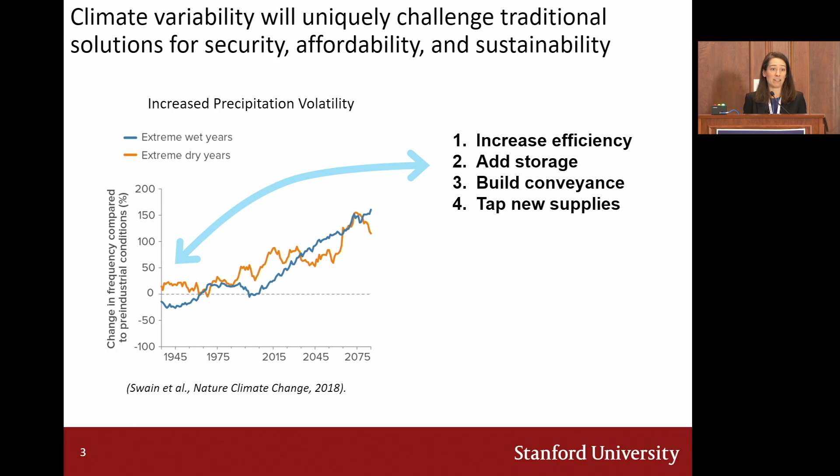In an era of higher volatility, that infrastructure suddenly has to address a 90% supply deficit in one year and turn around and manage massive flooding in the next. And that's much, much more challenging to design for. It's also much more costly to design for.

And so this, I think, sets us up in a little bit of a conundrum. We can either build a lot more of the same infrastructure, or we can build a very different type of infrastructure system or network to natively adapt to that volatility. That's the challenge, first and foremost, for securing water systems in an affordable and sustainable way under new climate regimes.

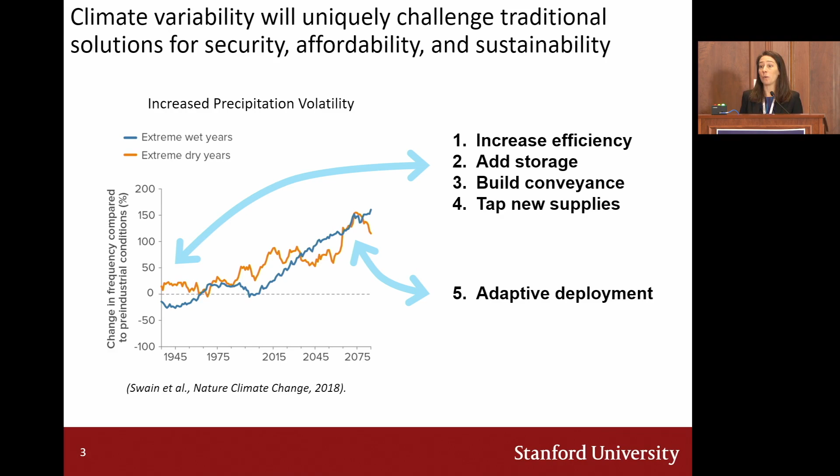And I want to talk in this presentation a little bit more about how I think we can help get us there. So how do we maximize the financial value of investments and their adaptive capacity? I believe that doing so is going to require pretty substantial innovation in a couple of areas.

We need infrastructure systems that are versatile, so they're doing more than one thing at the same time. We need distributed infrastructure that augments the capacity of central supply. We need infrastructure that's inclusive and finds ways to engage all sectors of the populace. And fundamentally, we're going to rely on much more adaptive control through digitization and integration of physical infrastructure and digital infrastructure to make sure this all works smoothly.

So I want to share a little bit more about each of these elements, and then spend most of the rest of my talk talking about a future of digitization in the water infrastructure space, and ways that we as a research community can use digitization, and ways that the practitioner community can leverage digitization.

Okay, so let's start out with versatility. We need to make infrastructure multifunctional and unlock its value by creating infrastructure that can be repurposed on demand. This is true both of how we design and implement water infrastructure.

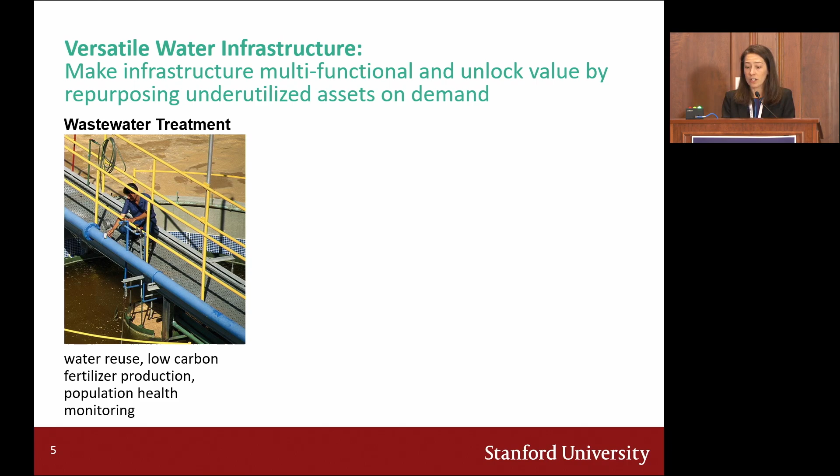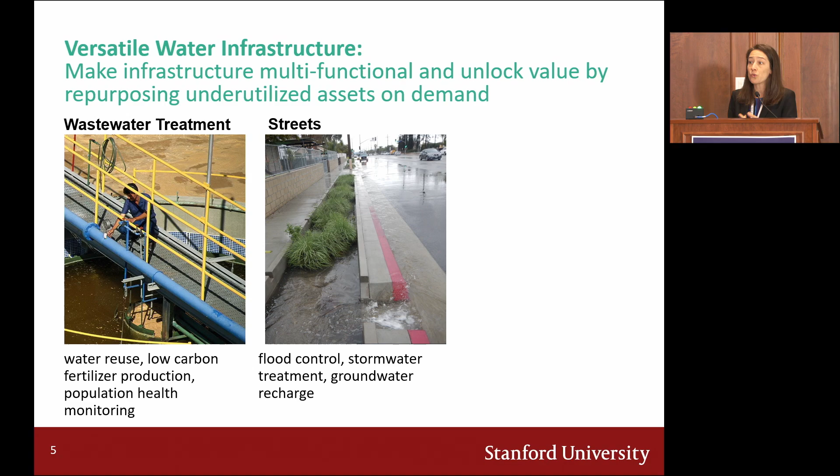For instance, I have colleagues that have done a lot of work on streetscapes. How do we, when we're investing dollars in building streets, also think about using them for flood control, for stormwater treatment, and ultimately for groundwater recharge?

Or in the case of flood protection, where we're going to see a lot of investment over the coming decades, how do we think about using those dollars to also enhance natural ecosystems, fishery productivity, and water quality that might also be the source of our seawater intake for a desal plant?

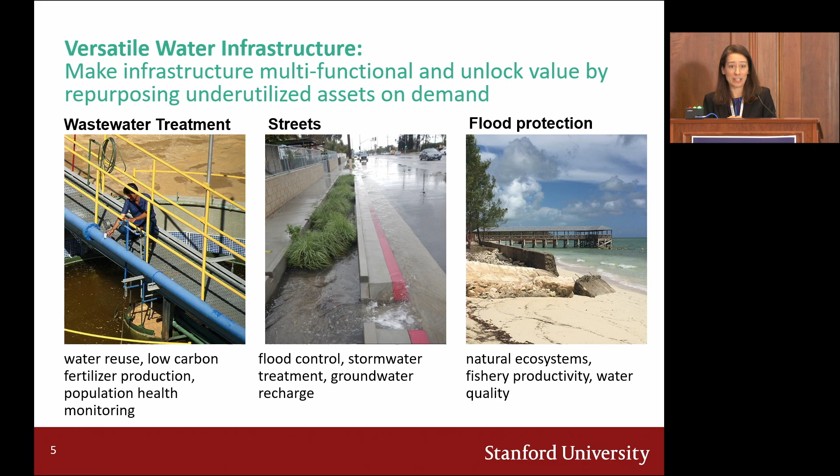In addition to being versatile, versatility works really well for centralized infrastructure. I think it's really important to think about augmenting centralized infrastructure with distributed water infrastructure. So figuring out ways to adaptively augment, particularly aging infrastructure or inadequate centralized systems, with small-scale distributed systems in an adaptive manner.

This has been a core mission space for the National Alliance for Water Innovation, which I serve as research director for, and so many of you on the US side have so deeply contributed to.

I think it's also been a real focus for helping cities like San Francisco. This is a picture of me taking one of my classes to the rooftop deck of Epic Cleantech. Epic Cleantech is a small company that builds, maintains, and operates on-site water reuse systems for large buildings in San Francisco.

Buildings over 100,000 square feet that are required to have on-site reuse. And what you see in this picture are actually 3 different buildings: the tall one on the left, the one under construction in the middle, and where the crane is, the foundation of a 3rd building, all of which will have these small-scale on-site reuse systems.

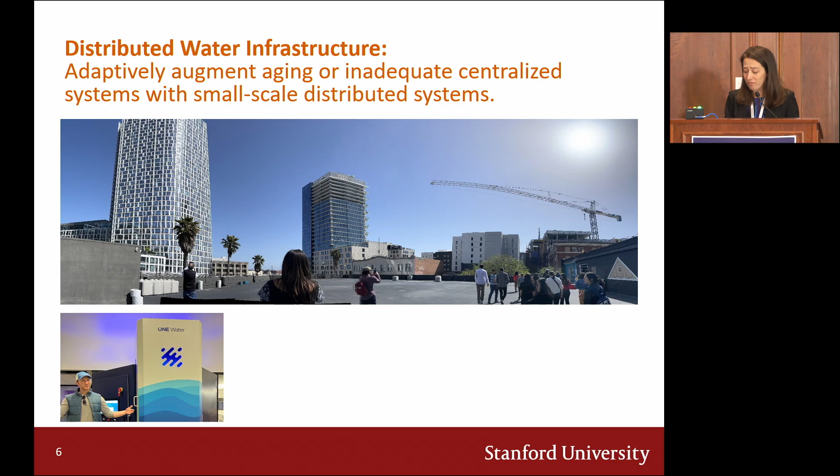These large cities that are increasingly densifying in the US have real constraints in how large the conveyance system is. And rather than upgrade the entire conveyance system, we're seeing lots of value in minimizing the need for those upgrades through on-site reuse.

We're also seeing lots of value in industrial applications where we can use the higher concentrations of contaminants in water and capture those at the source where it's easier to remove them, but also promote fit-for-purpose reuse on site at industrial facilities and help make sure the industry is adequately supplied with water and not drawing down natural resources.

Finally, I think we would all agree that there's tremendous additional value, in fact some of the highest value, when we see small-scale systems installed in low-density communities or peri-urban areas where the amount of infrastructure we need to install is not well aligned with the financial resources that are available.

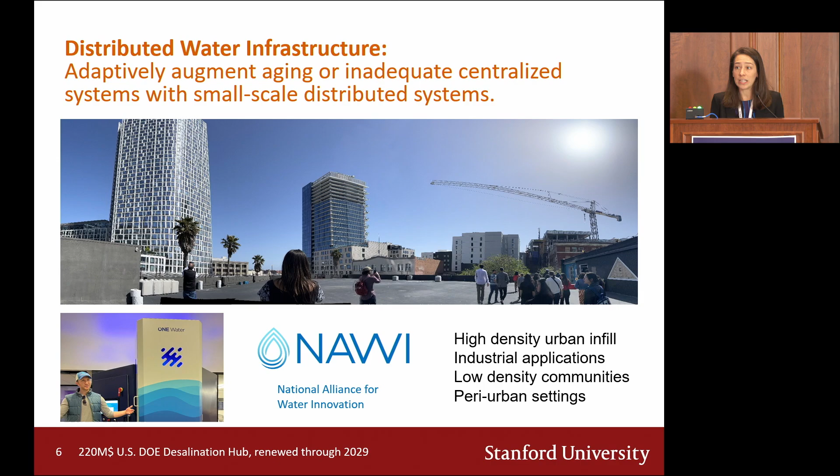That leads me to the next key feature I see in infrastructure investments, namely that we need to realize, one of the places we can realize the greatest value of alternative distributed or small-scale systems is in places that have historically had underinvestment in infrastructure systems. They have the furthest to go in terms of improvement.

A good example is a pilot project that NAWI has funded, led by University of California, Berkeley, operating in a small town of Allensworth, a town of 600 people in the Central Valley of California. They lack access to reliable, clean water supplies, and they don't have the financial resources as a town of 600 to build tens of miles of conveyance infrastructure to tap that water and bring it to their community.

Instead, we're piloting a small-scale groundwater treatment system for arsenic removal to help ensure there's a reliable and safe water supply for that community.

But I think it goes beyond just thinking about new technologies when engaging these communities. It's also about new financial models for helping to finance and maintain small-scale systems, and about new modes of operation and maintenance, especially bundling the operation and maintenance of those systems to help ensure the sustainable operation over decades that these systems will need to serve their communities.

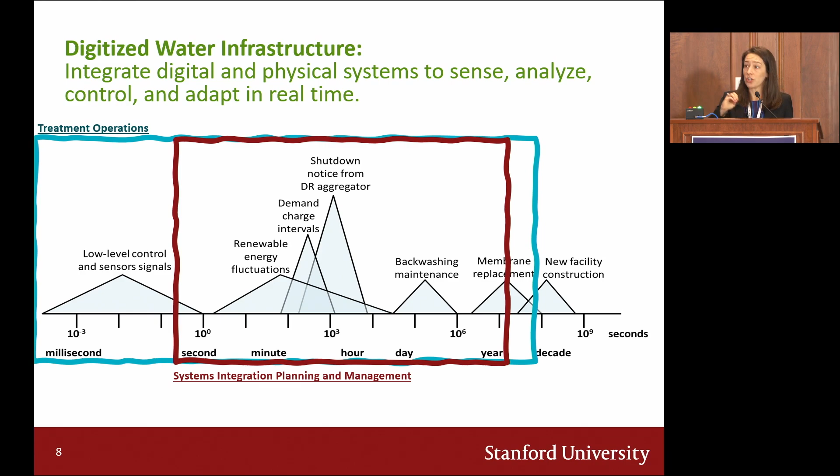This has been certainly a ripe area of research over the past several decades, especially thinking about how we can use control systems for treatment operations. But there's been substantially less thinking and execution of using those same control systems to help serve the integration of water systems with other infrastructure systems, or the coordination, particularly of water and energy systems, and the use of control systems when it comes to water supply portfolio optimization.

So today I'm actually going to talk a little bit more about digitization and focus the remainder of my efforts there. Zahi, I think, is going to share some additional thoughts and experience that he's had in automation and digitization of treatment system operations tomorrow afternoon.

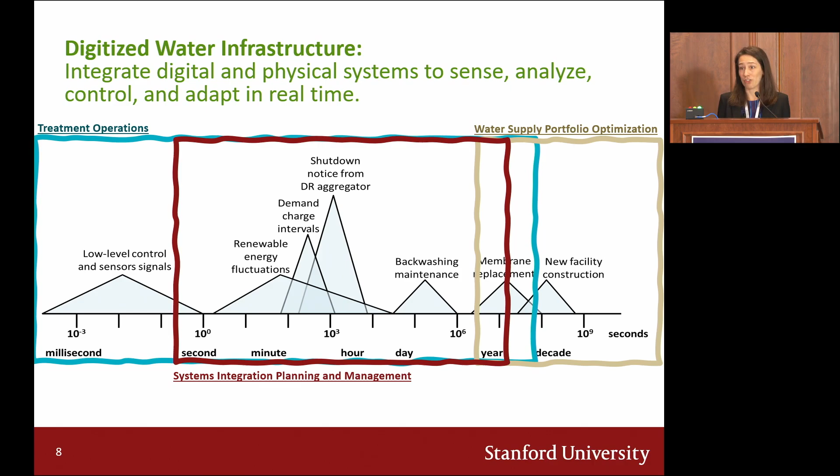So the two other areas, this coordination with energy infrastructure and the ability to think much more broadly about the use of control in deciding what infrastructure to build, is, I think, a really exciting area. And I'm going to start sharing some of our group's work in that area.

I'm then going to turn to where I see foundational research gaps in the development of digital twins for control and adaptive management. And then I want to turn to serving not just the practitioner community, but how can we as a research community use digital twins to help inform what we decide to work on, where we decide to focus our fundamental research efforts.

Okay, so I'm actually going to give this talk in terms of what not to do rather than what to do. So this is a picture of the Santa Barbara Charles E. Meyer desalination plant. I've done a lot of work with Santa Barbara over the past decade.

And this is not by any way an effort to criticize Santa Barbara or IDE, which was the builder of this plant. But it is a critique of how we've gone about historic planning around expansion of our water treatment infrastructure.

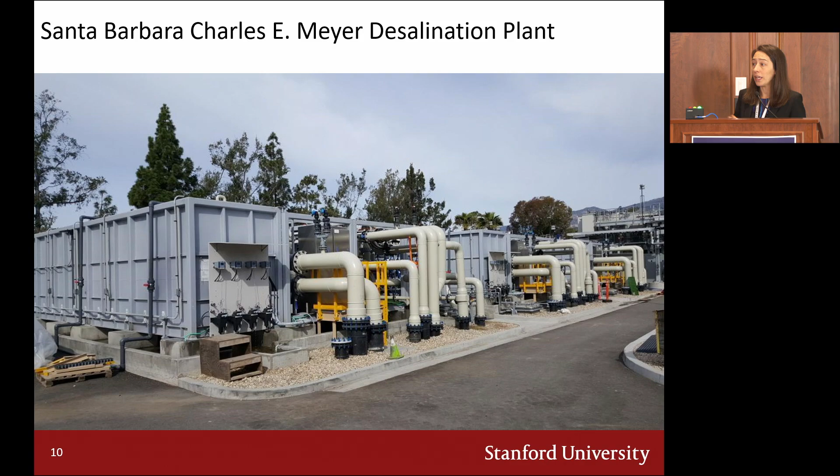In 1985 to 1987, there was a very, very severe drought in Southern California and coastal California. We were absolutely going to run out of water in Santa Barbara, and the decision was made to build a water desalination plant. It's a 3 MGD plant. It provides about 3,000 acre-feet per year, or 30% of Santa Barbara's water supply.

It was constructed and commissioned, and it started up in 1992 just as historic flooding hit Southern California, and we saw massive and rapid filling of our reservoir systems. And so after 3 months of operation, the plant shut down and did not reopen for another 20 years.

In fact, the whole plant was decommissioned, sold off in parts and pieces. And the effect was that the residents of Santa Barbara paid about $104 per gallon for the water they consumed over that 3-month period. Okay, so it's not to say that there wasn't retrofit.

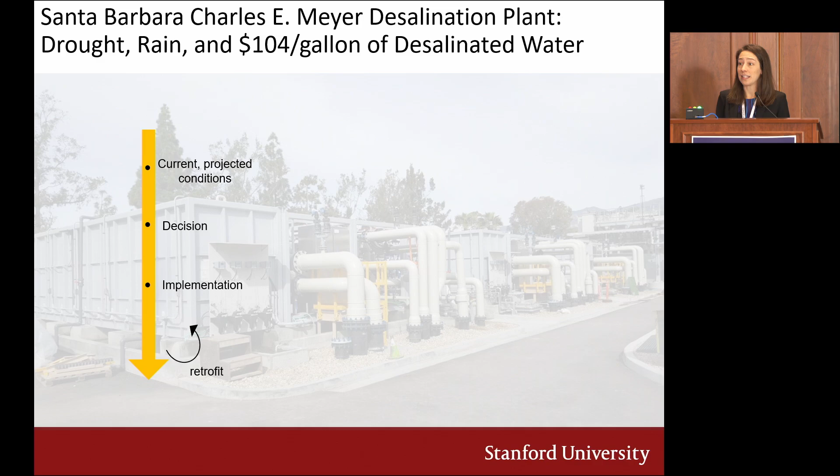There was recommissioning of that plant. But I do think that there is a tremendous opportunity to rethink how we decide when to build new infrastructure and what new infrastructure we decide to build.

Fundamentally, this more linear approach that you see on the left-hand side inspires us to build large capacity systems to buffer against hydrologic uncertainty. And that is kind of necessary if we're only revisiting our infrastructure decisions on a decadal basis.

If we instead move to a more closed-loop water resource management system where we are revisiting the decisions behind our infrastructure construction on a much, much more regular basis, I think that opens up the opportunity to really leverage some more of the dynamic attributes of small-scale distributed systems.

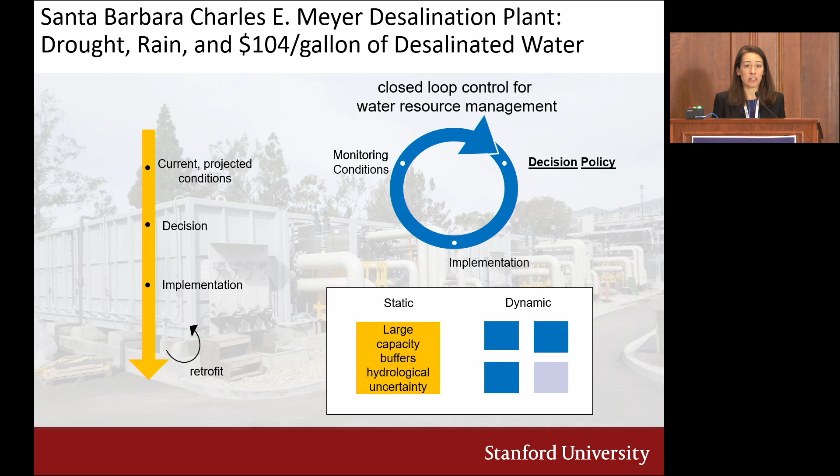So I want to talk a little bit more about some of the work that our group has done in deriving optimal decision policies for when, where, and how to build out infrastructure. We've looked at these technology deployment policies in the city of Santa Barbara, using a tree-based reinforcement learning approach to derive optimal decision policies based on historic drought characteristics: the frequency, intensity, and duration of historic drought.

We train models on tens of thousands of simulations of that historic drought, and then use that to understand what technology or what decision policies inform what technology to implement, at what volumes, in response to what triggers, and when you should decommission that infrastructure.

So what you see is that for historic drought scenarios, it may very well have made sense to build centralized capacity and decommission it for a period of time. The cost optimal set of policies around infrastructure build out would have also made much more extensive use of decentralized infrastructure, so smaller scale infrastructure that could be commissioned and decommissioned rapidly without trying to recover a lot of the capital expense that you see in building a large centralized plant.

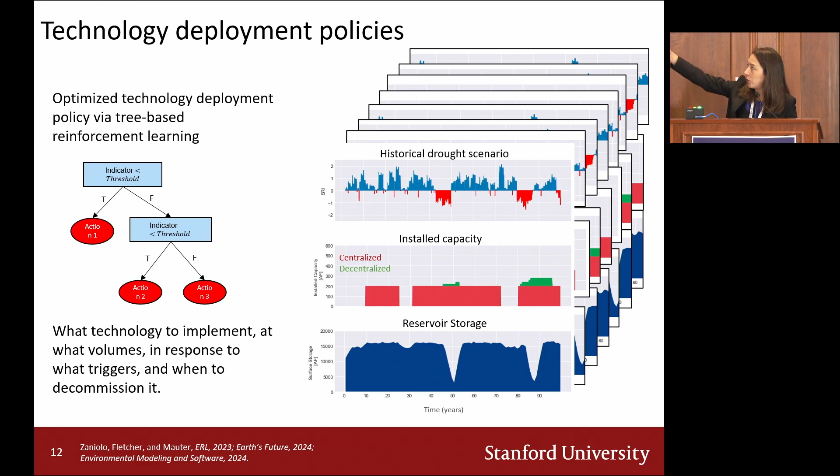The other thing you see here is that in terms of triggers, we're not just looking at what's happening in the historic drought space, but using an understanding of storage throughout the system, your reservoir capacity, to inform or trigger when to build that infrastructure. So you tend to build that decentralized capacity when you're getting big drops in how much storage you have in your reservoir systems.

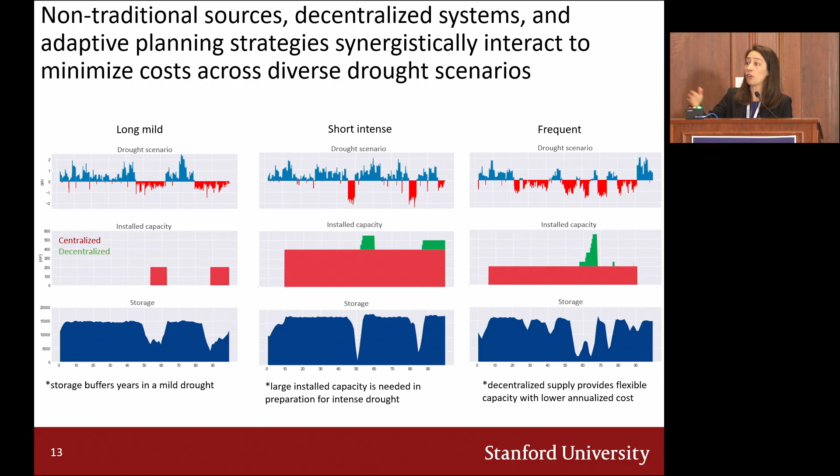Because this is a digital representation of Santa Barbara's water supply system and hydrologic system, we can perturb that to ask questions about what would happen under future climate scenarios where we might see significant changes in drought characteristics. So we can look at longer, more mild droughts, or shorter and more intense droughts, or more frequent droughts, and update decision policies to reflect the different hydrologic scenarios, which then inform which types of technologies get implemented.

All of that also lets us look at the differences in cost between different future climate scenarios, which helps us place a value on understanding, measuring, and monitoring what exactly is happening in both the historic record of drought and how climate change is expected to change those drought characteristics.

So I'll conclude here and say that adaptive deployment is really important for minimizing costs within the scenarios, and the value of information we get from looking at the effect of those different drought scenarios helps us as a scientific community direct our research efforts toward better understanding how future climate scenarios are going to change or preference one drought type over another.

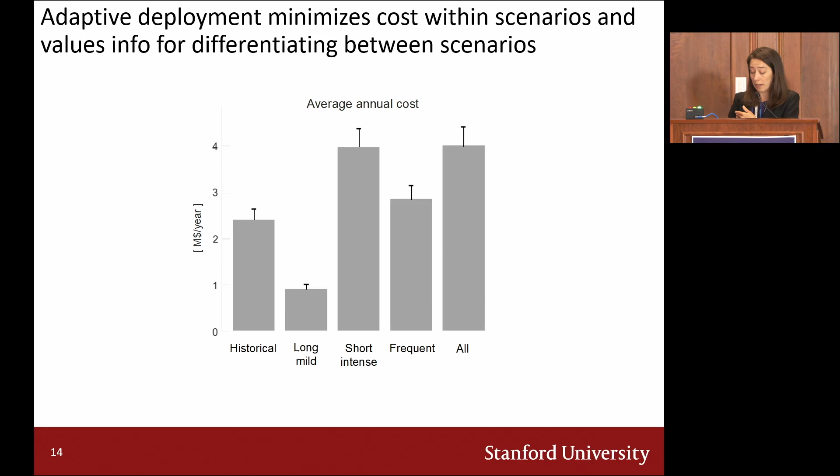Okay, so the second example I'm going to give on the digitization front is also at the Santa Barbara desalination facility. When this facility was recommissioned in the early 2000s, it was built and designed in a regime in which electricity prices in California were actually fairly flat. We were constrained, but not tremendously constrained, in our generation and transmission infrastructure.

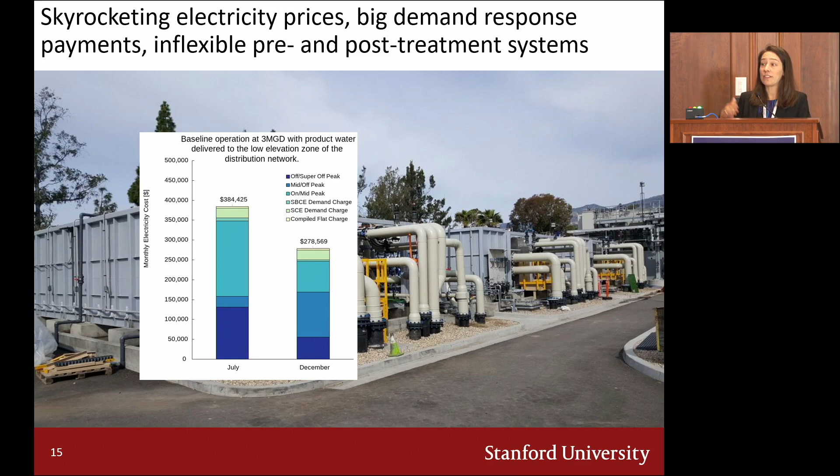And there was no time-of-use pricing at that period of time, which is to say it wasn't more expensive to consume electricity from 4 to 9 p.m. than it was to consume electricity at any other part of the day. But over time, over the past 20 years, we've seen massive changes in our energy infrastructure, and I'm happy to keep going, but it's better to do so with slides.

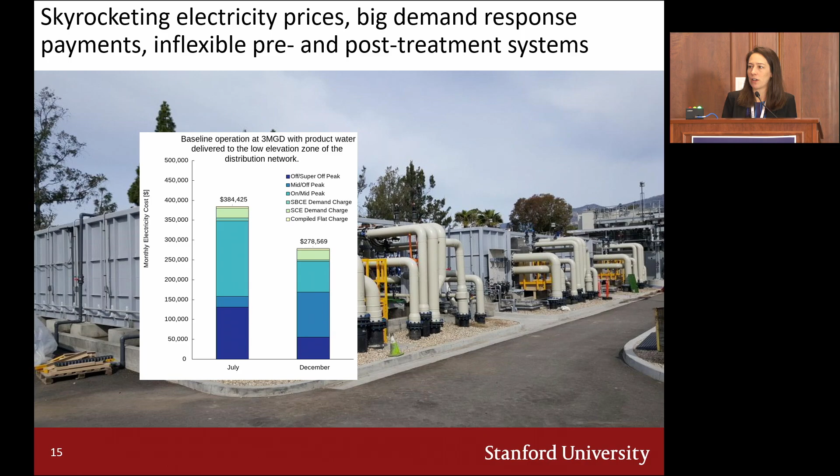This desalination plant today, which has a baseline operation of 3 MGD, pays about $400,000 a month for electricity in Santa Barbara during the summer, and about $275,000 a month in wintertime. So there's massive variation seasonally now - that's new. There's also massive variation in time of use. 90% of Santa Barbara's electricity bill is tied to the time at which electricity is consumed for desalination.

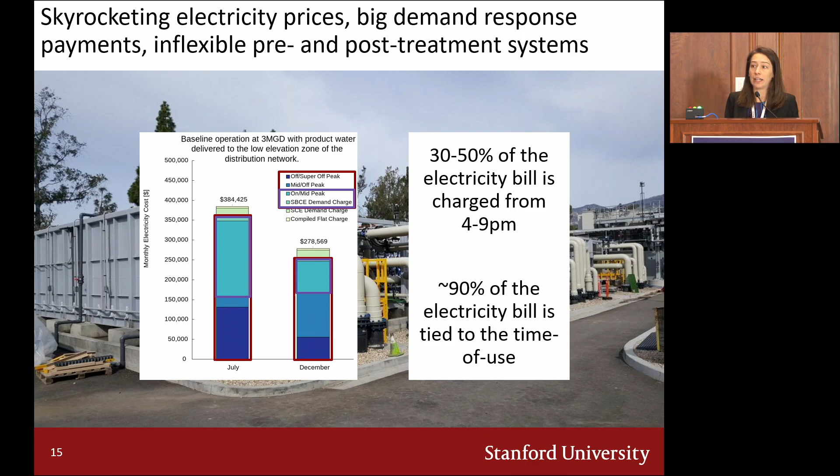It's charged in that 4 to 9 p.m. period window. It's tied to time of use, but 30 to 50% of that electricity bill is charged between 4 p.m. and 9 p.m. This creates clear energy arbitrage opportunities where shifting the load of the plant would not only benefit the electric power grid by reducing congestion, especially challenges with generation at that time of day, but it would also save the desalination plant a tremendous amount of money when it comes to delivering water.

We've actually done a lot of work with this plant to better understand just how much you could potentially save, both under scenarios in which you maintained the full capacity of the plant, as well as scenarios in which you were to curtail that capacity, particularly in years when you don't need all of that desalinated water because you're spilling water over the top of your reservoir anyway.

We've structured this optimization problem, it's a dynamic optimization problem, to minimize the monthly electricity costs subject to the prevailing electricity tariff structure, the existence of demand response calls. Those are not standard electricity tariffs, but emergency situations in which there's a risk of a brownout if we don't shed load.

There's an opportunity for desalination plants to derive value from that kind of participation in those emergency demand response programs. The dynamics of the facility, things like how quickly it can start up or shut down, and monthly water production requirements that the city needs to make sure that the water supply for Santa Barbara is secure.

So we've structured this as a multi-period optimization problem. We have a digital representation of the plant, and at the same time we're actively calibrating that to things like what's your water recovery rate in the system, how well is their pretreatment system working, and what are the rates of the prevailing tariff rates for the electricity sector.

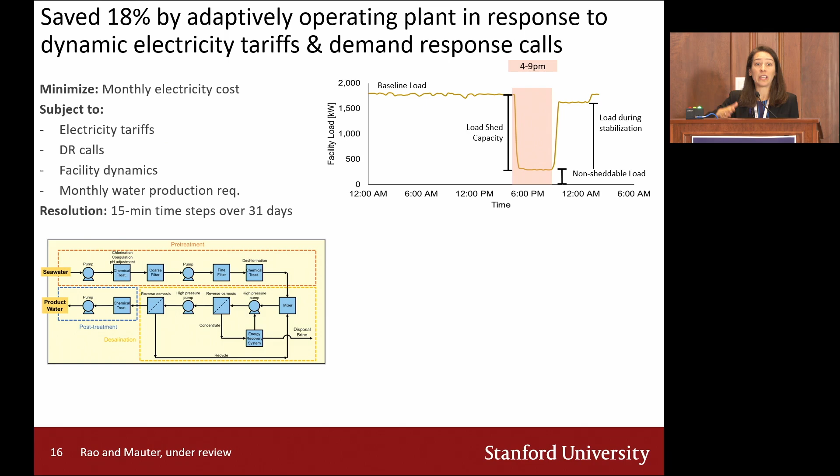What you can see in the top plot is that there's a period of restabilization, particularly at the Santa Barbara plant, where it takes a long time to remineralize the water and get that lime-based remineralization system back up and running. So we've also accounted for things like the lag between restarting the plant and when you can actually start to deliver water back into that system.

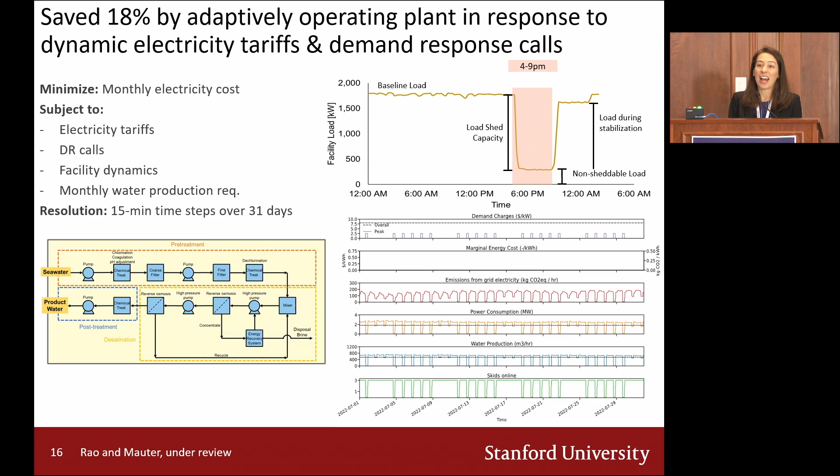I really think that this is the future, moving towards closed loop facility management, for both enhanced efficiency, which Zahi will talk about tomorrow, but also for facile and enhanced infrastructure coordination.

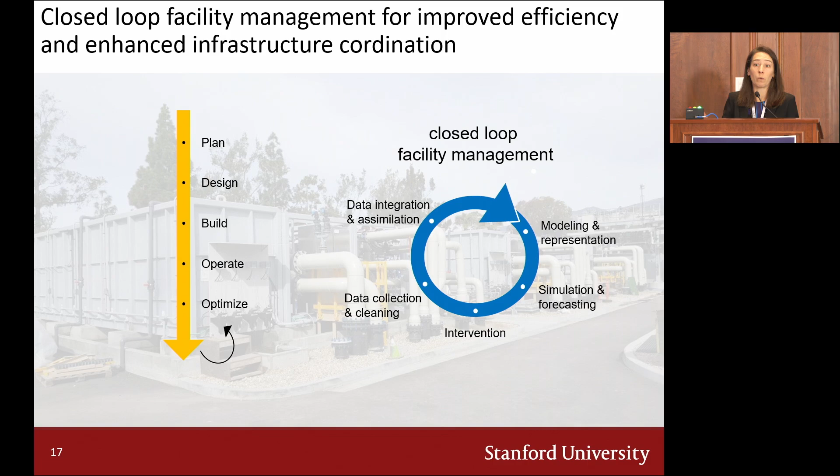So it's really about how do we move to a regime in which we are actively representing and modeling a plant, simulating and forecasting its performance, intervening, and then collecting data, cleaning that data, because it's never clean, and assimilating that data to inform what our next decision steps should be.

I'm actually going to skip the next couple of slides in the interest of time and turn instead to the foundational gaps that I see, or needs that I see, in digital twin development.

The National Academies actually came out with a report at the end of last year trying to put a kind of definition on digital twins. It's kind of everybody's most favorite and least favorite catchphrase today. I thought it would be helpful to share what the broader scientific community sees as the frontier in digital twin development and the raison d'etre for calling it a digital twin instead of just a model.

The difference between a digital twin and a model is that a digital twin is designed to be a fit-for-purpose and evolving virtual representation of a complex system with bidirectional feedback. The physical counterpart is providing data to the virtual representation, and the virtual representation is actively contributing to or determining control and decision-making in that plant.

Information could flow through a human. So the digital system could make recommendations to operators, like we did, to turn off and turn on the plant, or it could be automated. It could directly start up and shut down the desalination plant to facilitate its faster response time or management of many different components of the plant in a way that a single operator simply couldn't do.

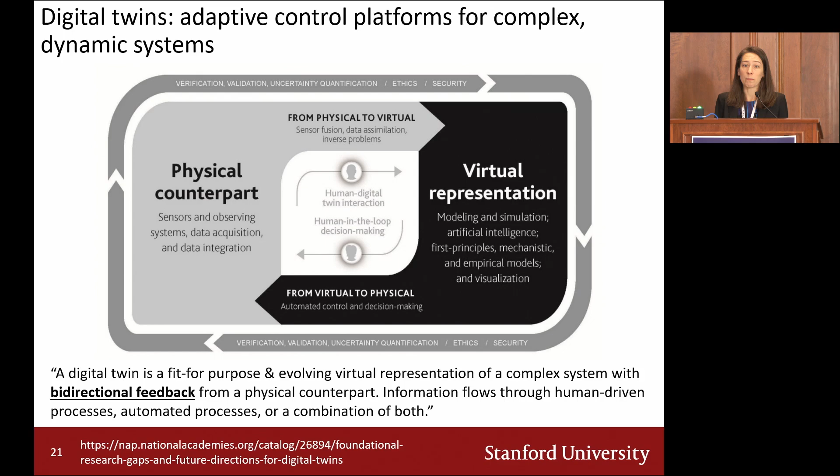So this is not my definition of a digital twin, but I think it is the definition from a consensus study by a group of scientists and engineers that do this for a living rather than do water for a living. I think it's useful for our community to read it. It's an excellent report that does a lot of deep thinking into digital twinning in the biomedical space, in the robotic space. It doesn't directly touch on water, but I think there's a genuine opportunity for our community to think through what those research gaps are in digital twinning that translate directly into the water space.

So I've made a first attempt at it here, but I look forward to rich scientific discussion about that need and opportunity in the coming breaks.

On the fundamental science side, I think there's a lot of challenge in bridging time and length scales in the water space, in integrating very diverse multimodal data into these digital representations, in thinking about ways to categorize and make sense of all the data that comes out of our plants. That's actually a real challenge—we don't use most of it today anyway. And to figure out how to represent systems when we don't have perfect visibility into plant operation.

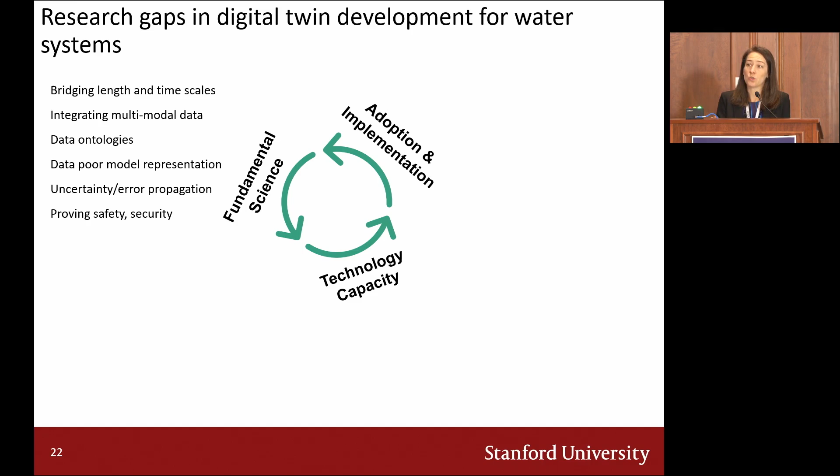We need to think about where uncertainty or even error in our measurement systems can lead to uncertainty in model recommendations, and can lead to errors in recommendations that might occur—figuring out how to prove the safety of those recommendations and the security of the back-end systems that are providing signals to plants, because this is critical infrastructure supplying people with water they need to know is safe.

There's also, I think, some scientific challenges in terms of technology translation. So how exactly do you represent a plant is a bit more of a practical question, but it's really important not to overrepresent the plant or underrepresent the plant when building a digital twin.

You need to have a digital twin that is itself fit for purpose. That's going to require that we balance fidelity of the models with scalability of those models, but also that we understand which of those variables we can observe, because a lot of things that we put in traditional modeling efforts to represent facilities are not actually directly observable over the time scales necessary for control. So we rely on proxies.

And fundamentally, we need to demonstrate that the digital twins we build are going to work and provide value. It's kind of easy when you're dealing with coordination with an energy system—you have huge arbitrage opportunities and can readily derive financial value. Moving in a direction where you're not just looking at financial value, but also at water quality or enhanced sustainability of these efforts, is going to require making a really concrete case about the value these digital twins can bring.

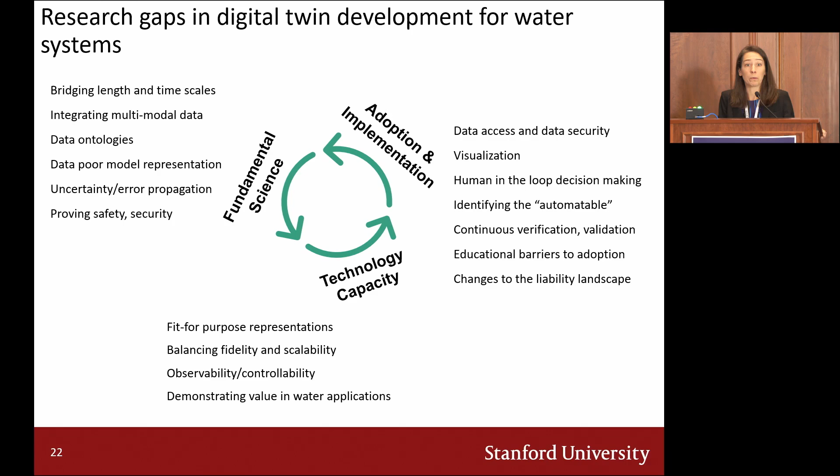Finally, it's going to really require us to change how we train our students and our workforce to actually understand and use these types of models. And it's going to force some changes in the liability landscape. I think one of the biggest barriers to adoption is that current operators can lose their licenses if something goes wrong—they are personally liable for failures at plants. We need to better understand how liability shifts in a legal landscape in order to encourage or promote their willingness to accept these recommendations.

I will also just say I think that the existence of digital twins in the commercial space today tends to address only one of the three questions that those digital twins could address.

So there is a very robust innovation ecosystem around digital operation of plants in the water space today. But most of those companies are focused on how you should design the system and operate it given current conditions. They're trying to optimize design, operation, and maintenance, manage variance, detect failure and deviation, and diagnose faults. And that's super valuable.

But it kind of leaves on the table two other classes of questions that one could ask with these same digital representations. One is, what will happen if the system is perturbed? What can we use these digital representations to ask questions about how to better respond to catastrophic events, or what's the benefit of system interventions and modifications? So more on the design side and the response side.

And there's also a set of questions that I think is particularly relevant to our community of researchers who are envisioning the next set of water treatment solutions, to help us ask what-if questions. What if different options existed? We can start to value additional information collected at the plant, or better science behind sensing systems. We can start to estimate the performance or impacts of new technologies in the context of actual operating treatment plants. And fundamentally, we can better establish technical targets for research and development and valuing innovation.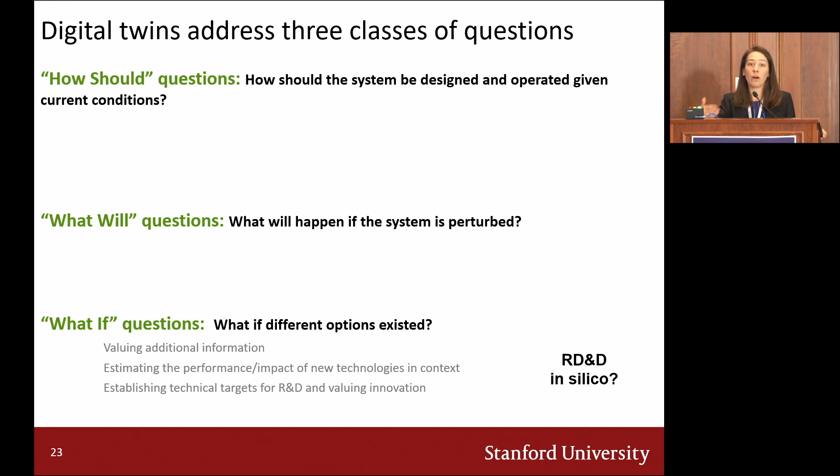This is a question near and dear to my heart as the research director of NAWI and kind of the steward of federal funds dedicated to R&D innovation. And I'm always trying to ask the question, to what extent can a project or a proposal actually mitigate not just a specific challenge at a specific plant, but the broader system water costs of water stress.

So let's take a proposal on the development of a new higher pressure membrane, maybe the one that Shihong is going to share with us in the next session. We want to ask questions about the value of that new membrane in the context of a variety of different treatment systems. We want to understand how Shihang's or anyone else's new membrane material is going to increase the cost of those membranes, but also how its performance is going to change, and then how the combination of cost and performance are going to change the cost of, for instance, desalinating water using LSRRO.

That sounds easy. In fact, it's really, really hard. If you're going to define that decision space, how improvements in cost or performance are going to change the overall cost of producing water, you need to look at somewhere between 10 to the 2 and 10 to the 5 interacting variables in a treatment train, and you need to characterize that over what's effectively an infinite number of possible water quality solutions. We can't do that in the laboratory.

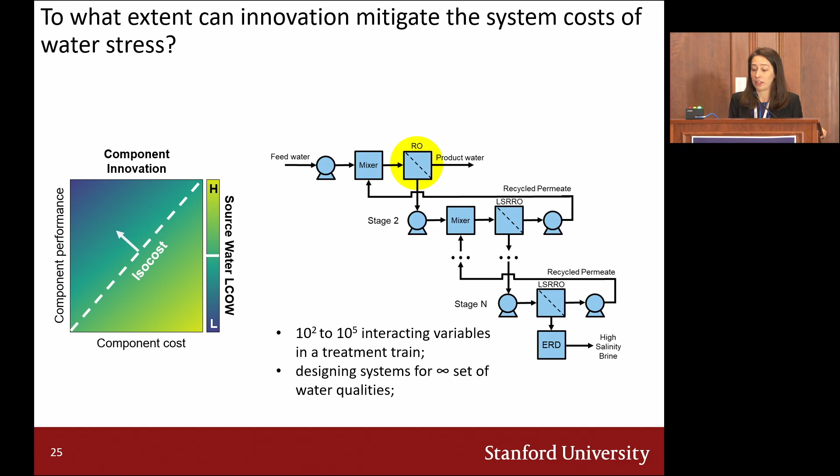You can't pilot that, and so we really need to rely on models to help us, go so far as to say digital twins, to help us really fundamentally understand where there's value in innovation at the component level. The same applies at the treatment train level.

So we can think about, for instance, LSRRO replacing mechanical vapor recompression as a solution. There's going to be big changes in the effect on capital costs of that system and operating costs of that system. And understanding how those changes in capital and operating costs translate to overall costs is actually also non-trivial and fairly complicated.

And it's not just CapEx and OpEx ratios, it's what's the effect of that transition on economies of scale, on reliability, on all these other things that ultimately go into determining whether we use a technology to secure water supply systems, and how all of those change the cost of securing water supply systems in that context.

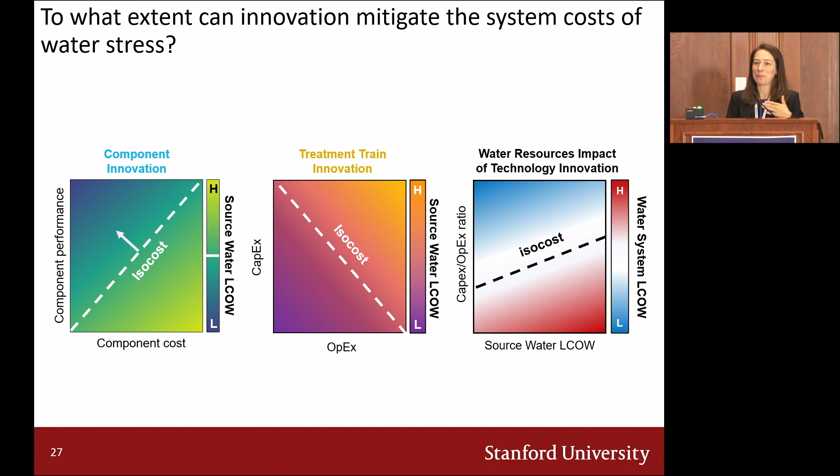Okay, so at this point, you're all ready to walk out the door. You're like, I don't know, I don't care, I just want to work on my better sorbent. Of course, not every laboratory scientist can do this. And so one of the things that NAWI has really prioritized is delivering computational tools to the water community to help align innovation priorities.

We've pulled on the water technology community's expertise in process systems optimization and the water resources community's expertise in portfolio optimization and capacity expansion models to try to create an ecosystem where we can really inform and align innovation investments for a water innovation community.

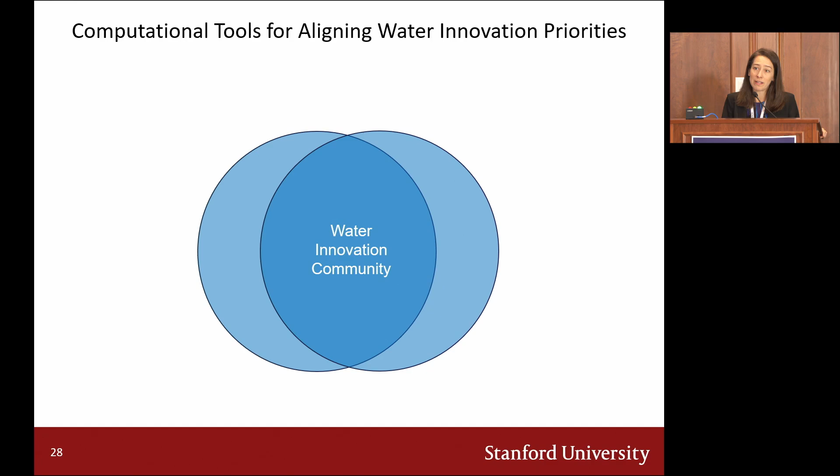I'm not going to go into tremendous detail on those tools. The US researchers already in NAWI have seen way too many presentations I've given on WaterTAP, this water techno-economic assessment platform that NAWI's invested many millions of dollars in developing. But what I want to go through is, more importantly for the Israeli counterparts, what WaterTAP is and how we can use it.

We can then use WaterTAP to inform a second set of tools that NAWI will be developing in its 5-year renewal process, around informing and planning adaptation of U.S. water supply systems using non-traditional waters, and then those models ultimately informing which non-traditional sources we choose to focus on as a research community.

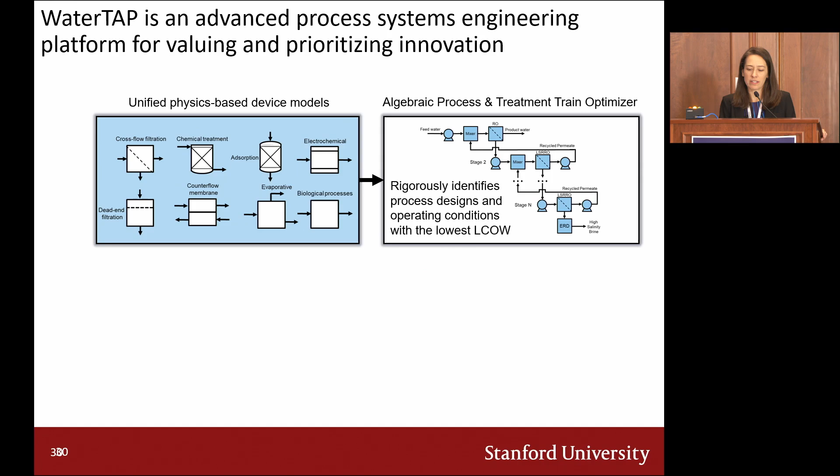So very briefly, WaterTAP is an advanced process systems engineering platform for helping us both value and prioritize innovation. We have a model library of unified physics-based devices that you can assemble into a treatment train. That optimization environment helps us rigorously identify process designs and operating conditions with the lowest levelized cost of water. We have very frequent releases, and if you're interested, I'm happy to share more details.

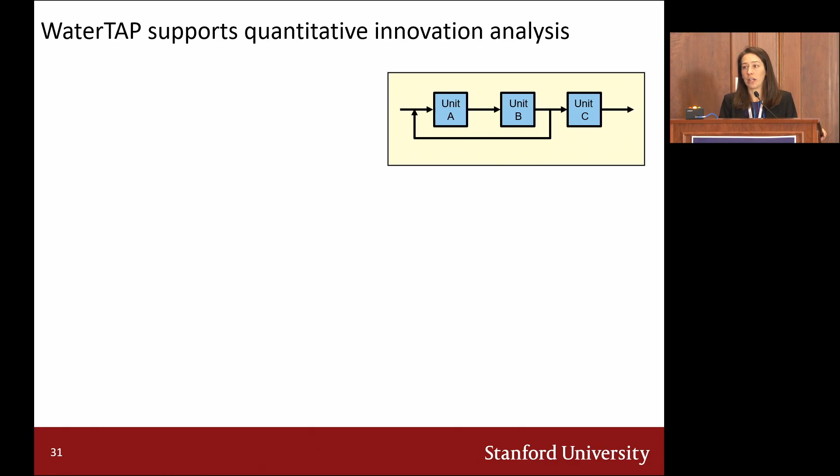Ultimately, WaterTAP is really valuable in supporting quantitative innovation analysis, helping us estimate the performance and costs of emerging technologies before we invest a lot of effort in their development, benchmarking innovation targets to a set of existing technologies. Will that new technology actually displace technologies already on the market? It helps us de-risk innovation trajectories and prioritize focusing on cost reductions of components versus improving their performance.

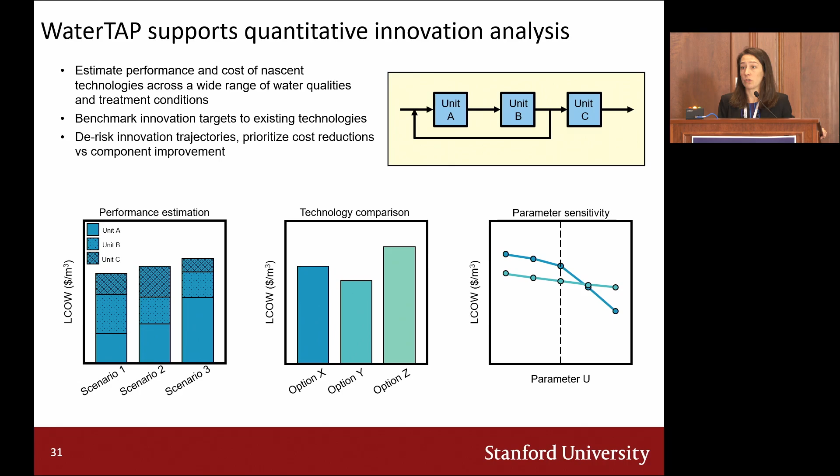For instance, when we were starting out, we focused heavily on how to lower the cost of inland brackish water concentrate management. We looked at a range of proposed and emerging technologies in that space, tried to understand which technology was cost optimal and how much its lowest-cost implementation would be, and then what would be the value of new membrane innovation in that space.

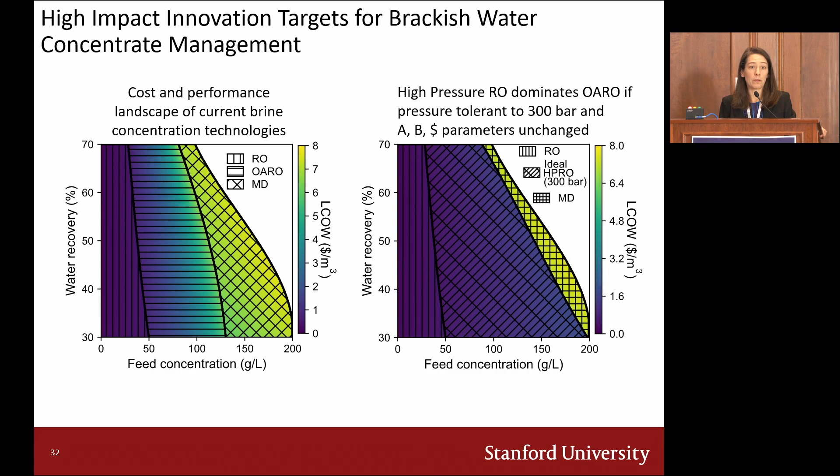We found, for instance, that if you could create a high-pressure reverse osmosis membrane that went to 300 bar and was tolerant of high salinities, you could displace some of those technologies, so it wasn't worth focusing on them.

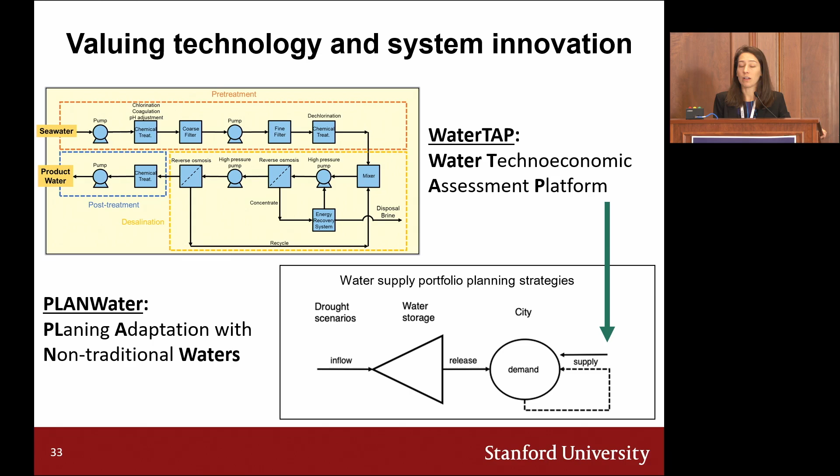Again, while WaterTAP focuses on the value of individual component innovation, we're really interested in understanding how the costs of individual water supplies and the attributes of those treatment systems for purifying them can help reduce the cost of supplying a city with water. In this case, Santa Barbara.

This is the same model I shared with you earlier, but instead of varying hydrology, we've varied things like technology attributes and policy attributes in that system to estimate the marginal value of technology innovation and policy change.

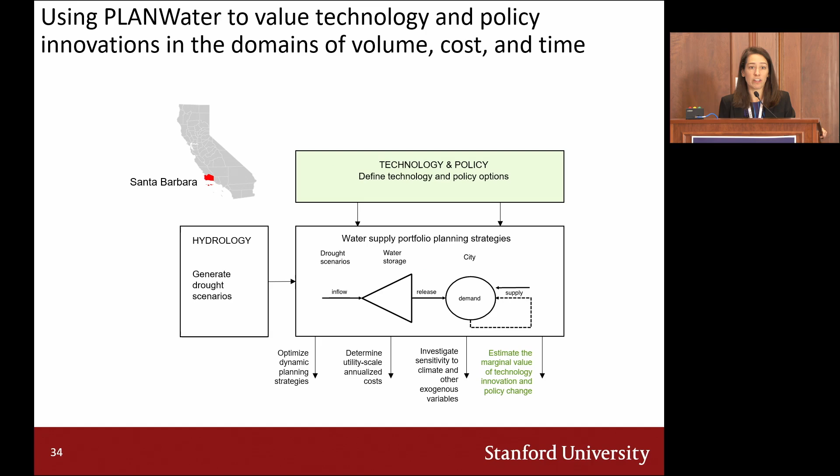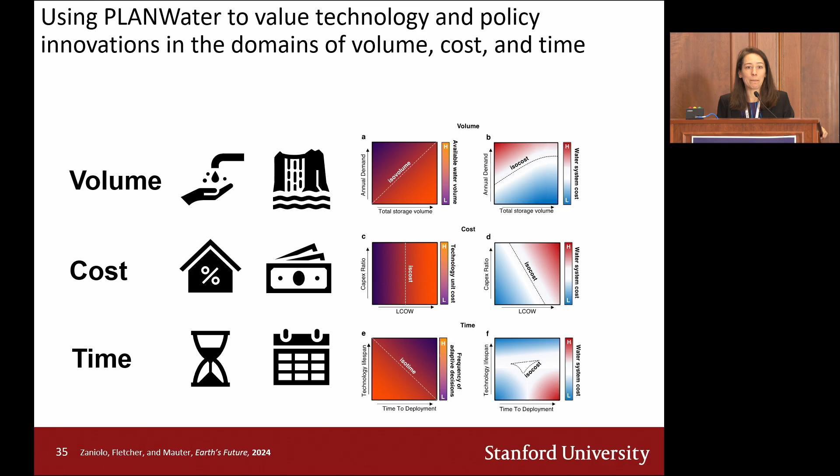We can think about innovation happening in a couple of different areas. One is volume—you either conserve more water or store more water. The other is cost—what's the ratio of capital expense to operating expense, and what's the total cost of delivering water from that non-traditional water source? And then time—how quickly can you deploy that technology, and how long does it last?

I don't want to go into tremendous detail here, but one of the things these models have uncovered, and will continue to help us better understand, is the water system cost space. We've seen, at least in the Santa Barbara model we've developed, that high-CapEx or low-operating-cost technologies really motivate steady production. That's how we've designed and optimized our seawater desalination plants today.

But we've also seen limited interactions with deployment time. In contrast, a low-CapEx facility encourages more dynamic drought response, and you see massive cost reductions—a 21% reduction in the cost of providing water to Santa Barbara if you can reduce deployment time by 30% and leverage more small-scale, dynamic, lower-CapEx, higher-OpEx infrastructure solutions.

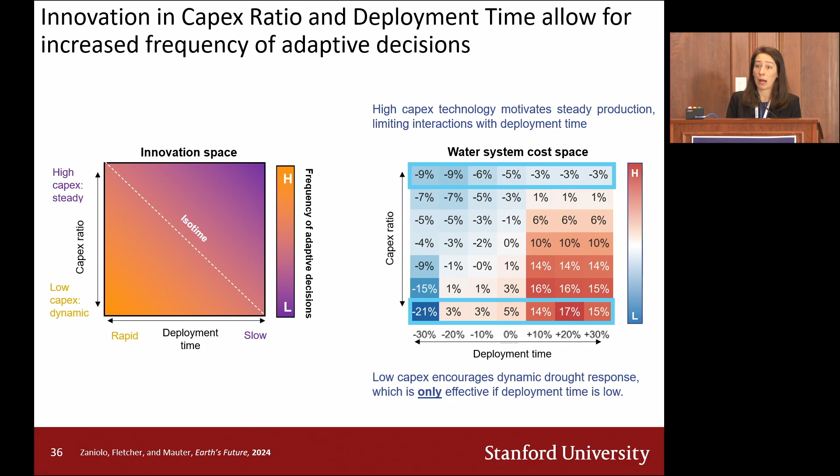So I'll close here and say there's an opportunity over the next several days to think about how our R&D efforts can stretch infrastructure dollars by complementing existing centralized infrastructure solutions with versatile, distributed, inclusive, and digitized solutions.

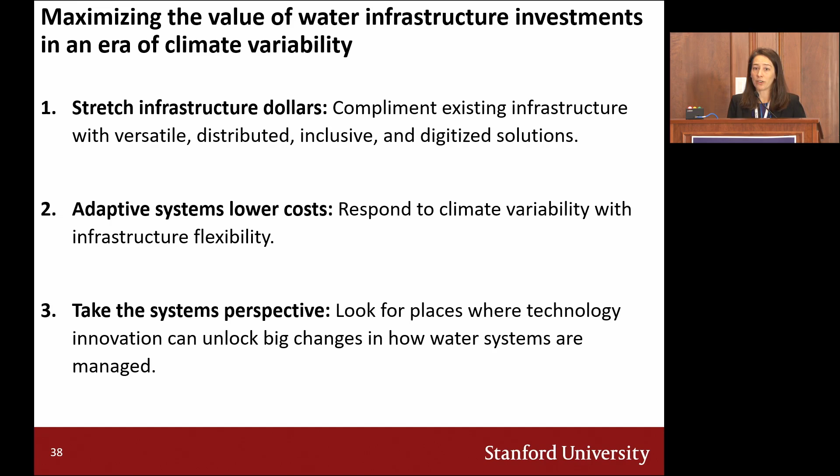We have a challenge of increasing the adaptive capacity of our infrastructure to help respond to climate variability, and I think there's a lot of research opportunity in that space. I'd encourage us more generally to look for places where technology innovation can unlock big changes in how systems are operated and managed. And with that, I'll close.